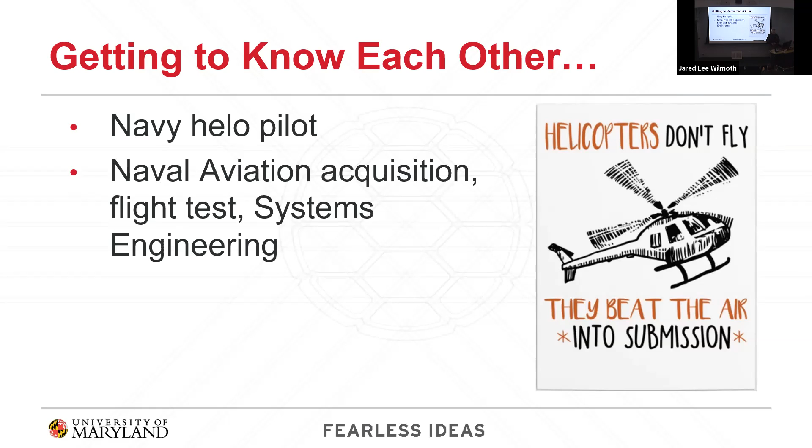So I was a Navy helicopter pilot after college, spent about 29 and a half years. Flew helicopters all over the world, on all kinds of aircraft carriers and other ships. Commanded a couple squadrons, one fleet, one test squadron at Pax River, Patuxent River Naval Air Station down in Southern Maryland. Ended up spending about 10 years in naval aviation acquisition, helping to specify the next generation of Navy helicopters, then helping make the acquisitions of those, involved in flight test of those helicopters. Also wrapped up as the military director for systems engineering at the Naval Air Warfare Center down in Pax River.

After that, retired in 2012, joined a small company just outside the gate down there and worked with them, where I did a little advising and consulting back onto the base, and also helped that company grow. So I was in industry for about 10 years. Then this opportunity presented itself last year around this time, and I joined the University of Maryland in August. It's been a great ride so far.

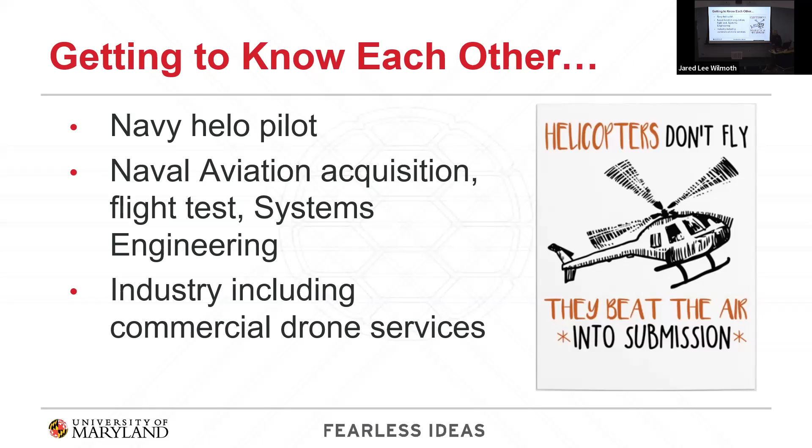So topics today: what are drones, what are they all about, what are we using them for, what are they good for? Good for a lot of things. Why aren't they everywhere yet? We've been reading now for 10, 15 years about how these things are going to be dropping off packages on our doorsteps, going to be everywhere, ubiquitous, doing everything. They're not. Why? We're going to talk about that a little bit. And then what's going on, efforts that are happening to try to get there, to try to make that situation a little bit different. And then finally, I'm going to talk about how the University of Maryland fits into this, specifically about the UROC in Southern Maryland and our role.

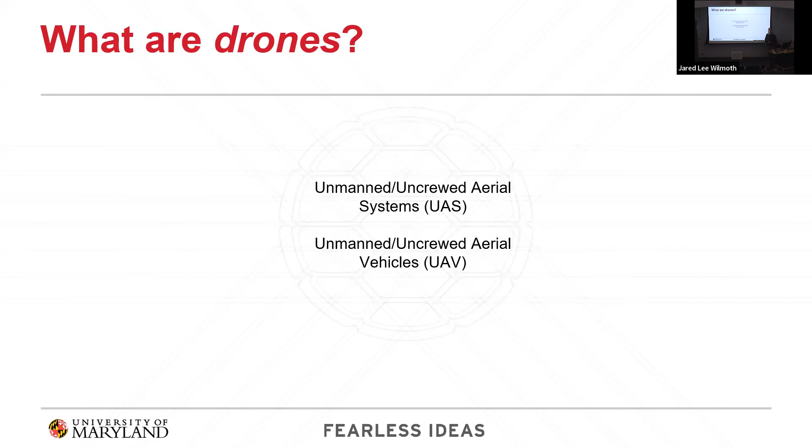So what are they? Uncrewed, unmanned aerial systems, aircraft systems. The acronym can be a little fuzzy, people say it a lot of different ways. And then there are the vehicles themselves that go up in the air.

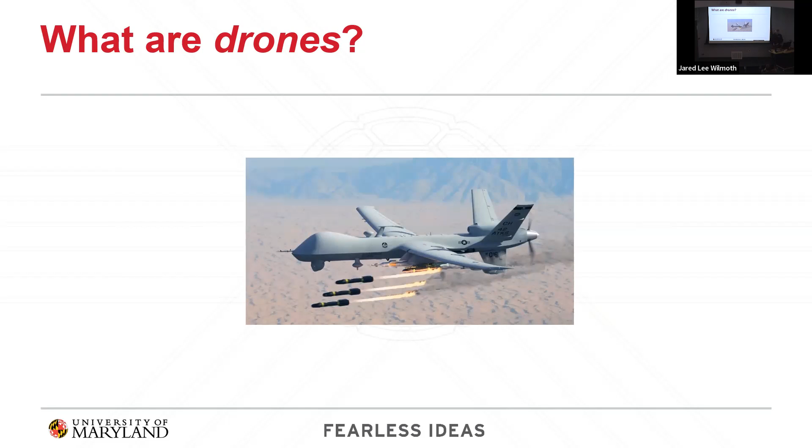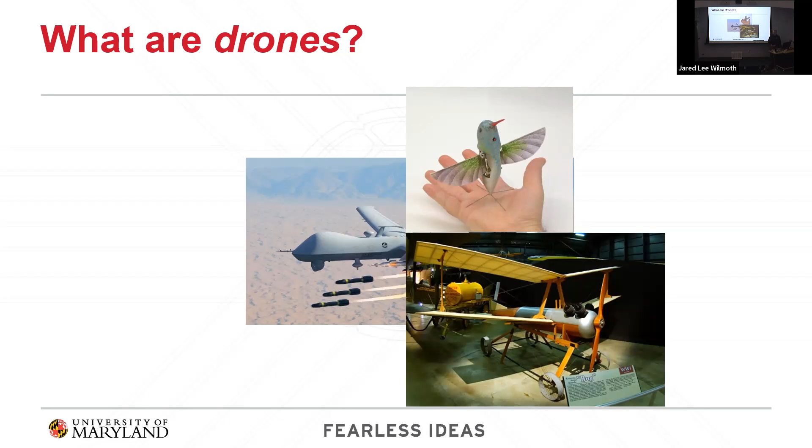This is a Kettering Bug. These things go back a long time ago. This was designed and operated during World War I. It's in the Air Force Museum. So uncrewed, unmanned aircraft have been around for a very long time, and this was obviously pretty unsophisticated.

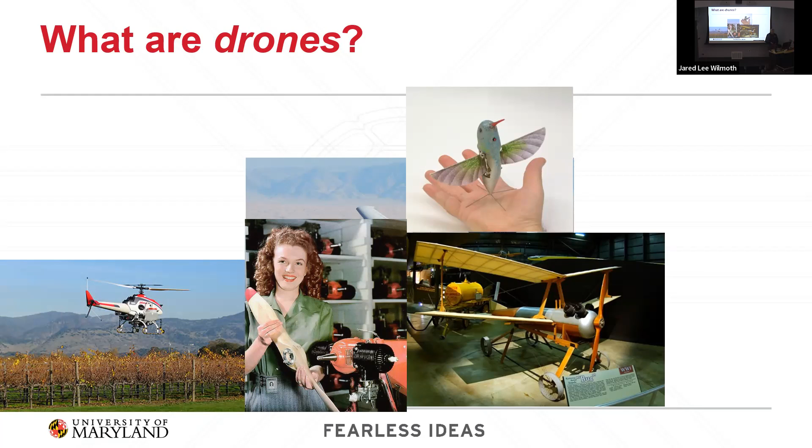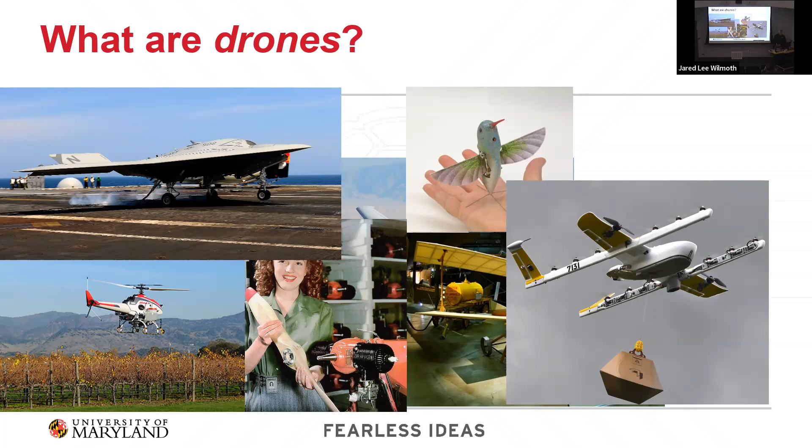They can come pretty big. This is the Navy's onboard aircraft carrier launch and recover refueling platform, the MQ-25. This thing is groundbreaking in many ways - first ever to launch and recover from aircraft carriers, and they're getting ready to deploy those. Pretty large airplane, as you can see, but even bigger they can go.

So what are they made up of? Uncrewed aircraft systems, that's the term we use, are made up primarily of the UAVs - those are the air vehicles - and all of the systems they carry, including the payloads. Keep in mind that what these things typically are is really a truck, okay, maybe a little one and maybe a big one, but it's those payloads, the things they're carrying, the sensors, that's what the real business of these things are, generally speaking.

One of the projects the UROC is working on with the Robotics Center here and Aerospace Engineering, with the Army Research Lab up at Aberdeen, is a project called Artificial Intelligence and Autonomy in Multi-Agent Systems. Think of swarms of drones, all intercommunicating and planning their own searches and coordinating their activities.

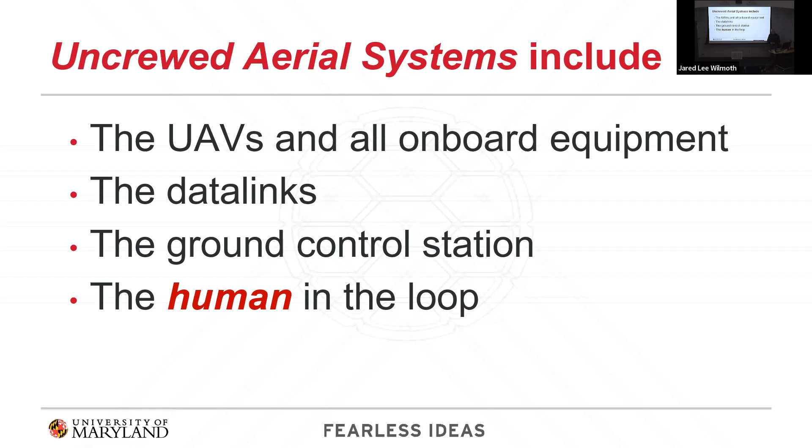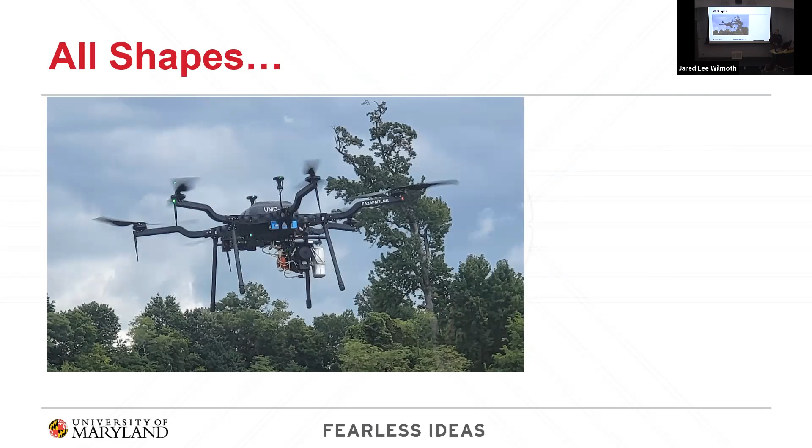They come in a lot of different shapes. This is a multi-copter, one of ours down at the UROC. It's about 5 feet across from rotor tip to rotor tip, up to around 55 pounds. There's also a single rotor type helicopter.

You'll see fixed wing - this is one of our Penguin B aircraft down at the UROC. It needs a runway, as you can see from the wheels. This is another version of that aircraft, and we're in the process right now of converting our runway launch and recover to this, which has got quadcopter type takeoff and landing motors, then converts to a pusher fixed wing aircraft for greater endurance.

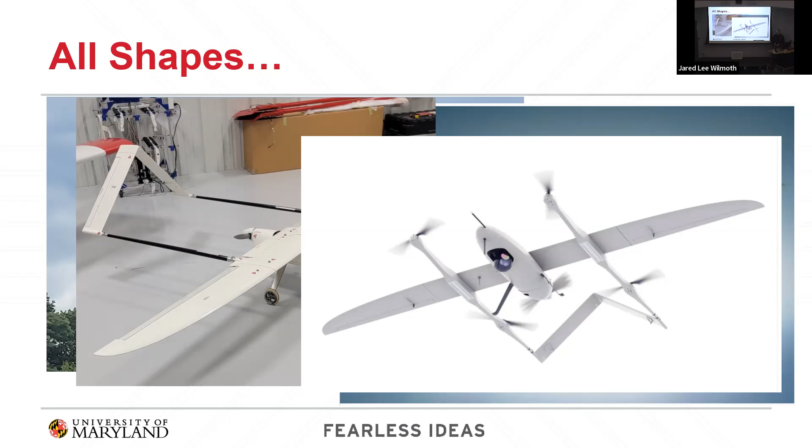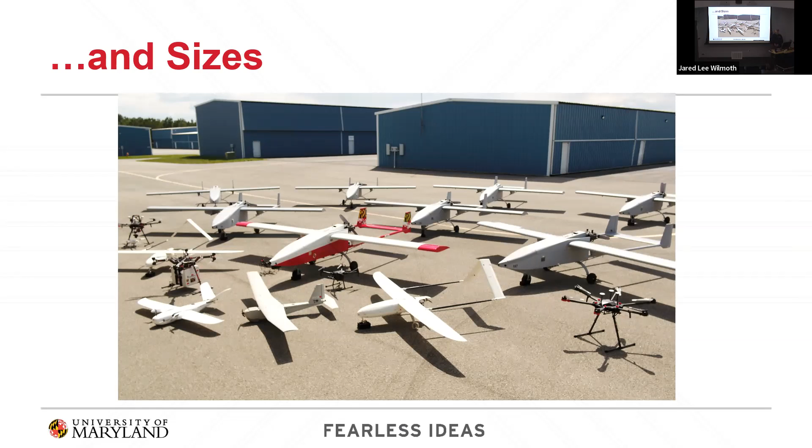This is a snapshot in time of our flight ramp at St. Mary's County Airport down in Southern Maryland. Some of those aircraft are gone now. A lot of those gray tiger sharks have moved on to a university out in New Mexico. The one in University of Maryland livery is going up in the museum down there, the Patuxent River Naval Air Museum. So this is just a snapshot of time of some of the ones we've got.

So what do you use uncrewed aircraft? For UASs, we commonly talk about the 3Ds: dull, dirty, dangerous jobs. That's what those things are ideal for. Some things are kind of dull, like flying back and forth staring down at the ground trying to see what might have changed. Drones don't get bored, so drones are really good for dull jobs.

Dirty jobs, things like getting into sewer pipes and inspecting them. People have to do that stuff right now, but drones can fly in there. Think about the stacks on a power plant. Right now we have to shut down the plant and lower humans down into those stacks on ropes to inspect them. You can do that with drones instead. You could think about a contaminated area, hazardous materials, or the aftermath of a natural disaster. There are a lot of applications in dangerous and dirty situations for drones.

Precision is another utility for these. They're great for things that require precision. As a Navy helicopter pilot, I was often involved with search and rescue, and when you're looking for something in the water or elsewhere, flying very precise patterns across that surface is key so you don't miss anything. But humans inherently have a hard time with that.

It gets boring, as I mentioned, the dull part. And it's also the control inputs it takes to stay on those patterns in wind, rain, and other inclement factors that can be challenging. Drones don't have that problem—they are extremely precise. Surveying is a similar issue, so precision jobs are really good for drones. Precision agriculture is a common application.

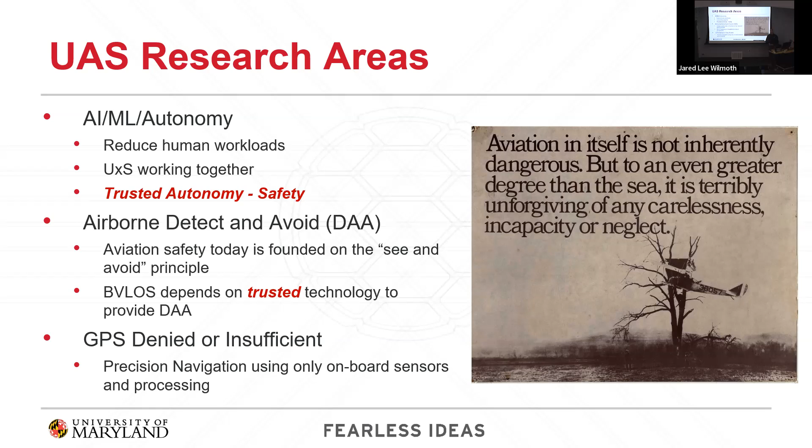And then precision navigation in areas where you don't have GPS - this could be underground, in caves, mines, inside of buildings, those kinds of places. It could also be in a combat environment where GPS is being jammed. But you need to be able to navigate precisely in order to safely operate.

So what's going on? I already mentioned Africa - that's a place where there is a lot of work going on with UAS. A lot less manned aircraft flying in Africa, so there's less risk of mid-air collision. A lot of unpopulated areas where the aircraft can be routed such that there is less risk of harming something if something bad does happen. So it's proving concepts, building up hundreds of thousands of hours to prove use cases happening elsewhere in the world.

Here in the US, industry is really driving hard. You've probably read about companies like Google Wing, Amazon Prime Air, which you may have also noticed has scaled back a little bit. Walmart is working with Zipline, the company I mentioned before. So there are a number of efforts going on in the United States to try to push the limits, push things forward.

The FAA itself, working with NASA, has done a lot of work in response to being pushed by Congress to get around this problem. So they've got some designated FAA UAS test sites around the nation, mostly rural areas, places like North Dakota, Alaska, West Texas, Oklahoma, where they're doing a lot of research on these problems in front of us.

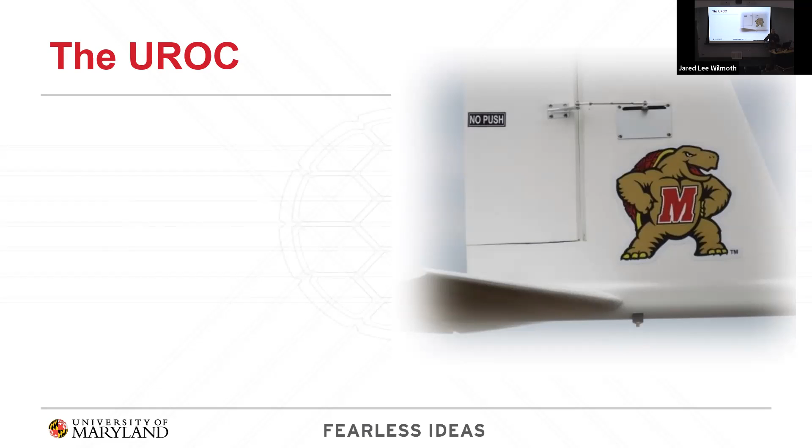The UAS Research and Operations Center is about 8 years old, down at St. Mary's County Airport, about an hour to an hour and 15 minute drive south of here, near Patuxent River Naval Air Station. If you're looking for us on a map, follow Route 4 or Route 5 all the way down until you hit the Chesapeake Bay, and we're right between the Patuxent River and the Potomac.

Our first part of our mission is research and education. So we support faculty, we support students, we have equipment, we have experience, and we have expertise, and we bring all those things to bear to help make projects go smoothly.

We support operational activities, by which I mean public and private entities. These might be organizations like National Oceanic and Atmospheric Administration. We just shipped a drone up to Alaska yesterday. One of our teams is heading up to Nome, Alaska in two weeks, where they're participating in the third year of an ongoing project with NOAA to measure sea ice thickness.

They're using satellite payloads to take those measurements today. However, the calibration of those satellites is a challenge for them. It's done manually, so they run humans out on the ice with handheld measuring devices and core drilling to try to calibrate and measure and correlate the accuracy of those satellite payloads. So the thought here is by using hyperspectral sensors and multiple wavelengths of light, we can get data that the scientists can then convert to useful information.

Somehow, don't ask me how they're doing it, but they are getting these measurements. Last winter, we were up on Lake Michigan in the winter taking these measurements, and they were ecstatic with the data they got. So this year, it's off to the real sea ice up there off Nome, Alaska. That's one of the public projects we've worked on recently.

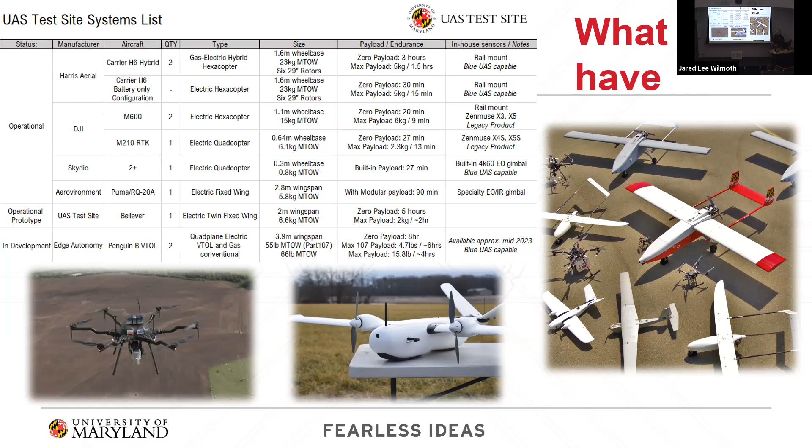And so we got a lot of different aircraft, a lot of different sizes. So what do we do? To a research project, we can bring equipment, just showed you some of that, but just as important, more important really, is the expertise. So we have engineers and pilots with thousands of hours flying UAS all over the world that can be leveraged.

We have expertise dealing with FAA and just about everything, whether that's getting what we call waivers to the rules, certificates of authorization and waiver, which is establishing chunks of airspace for use. So we can do a lot of things.

So I mentioned the payloads are really what we're talking about generally when we're talking about drones. So if some project that you're working on involves a sensor or could involve a sensor, which could benefit from going flying, it might be a thought you have, let's just go grab a drone, we will attach this thing to it and take it flying. And yes, you may be able to do that. But the commercial stuff you're going to find, the things you're going to go conveniently find, are not going to really readily be adaptable for that purpose.

So we can help with that. We can integrate those payloads onto platforms. We can help you find the right platform that's the right size, has the right kind of endurance, has the right kind of flight characteristics, and at the best price point for you too, which is of course important. We may very well already have something in stock, as it were, in that stable of aircraft that we can use for you and save you the entire cost of doing that. All we need to do now is integrate your payload onto it.

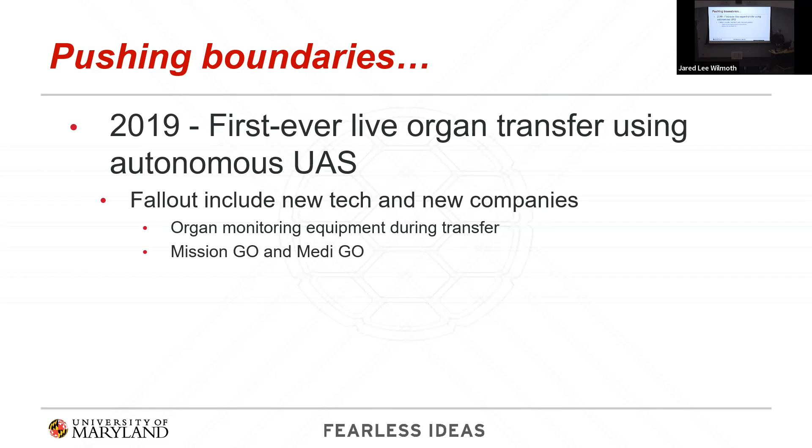The Chesapeake UAS route network is another place we're trying to push the boundaries. I mentioned the rules before - here we're trying to move into the National Airspace System with aircraft in the state of Maryland.

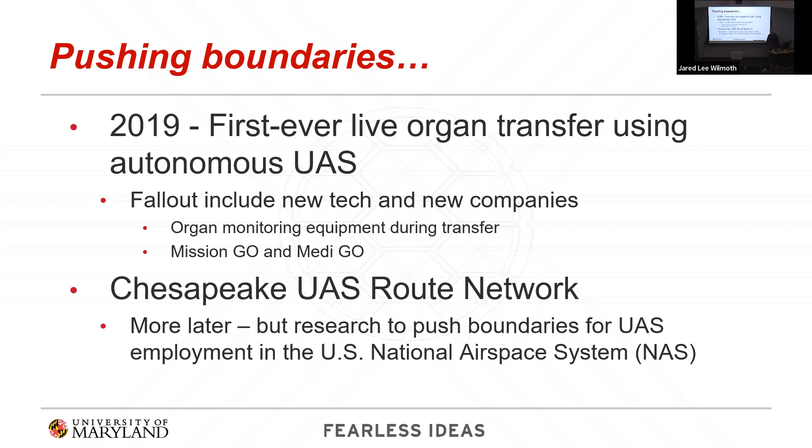So I already talked to you a little bit about some of the projects there - that was the ice thickness measurement. We've done lots of projects along those lines for various agencies over the years. I talked about integrations for private companies as well.

Airworthiness - a big part of safety in drones goes around airworthiness. Is it safe to fly? When you think about the aircraft you climb into to fly home, that thing started from a place of airworthiness, started from thinking about safety. How do we build a safe aircraft? That is really where it starts.

Drones typically start with, hey, this is really neat technology, and then later on comes the thinking about how do we do the aviation thing. That kind of gets things backward, and safety kind of gets thought of second. So airworthiness then suffers.

What does that mean? Airworthiness is a way of measuring the engineering goodness, if you will, of that airframe, making sure that it is a safe aircraft to go up in the air. So we've put together our own methods based on how the DoD does it, scaled down to be appropriate for small UAS, to measure them and make sure they are safe to take flight.

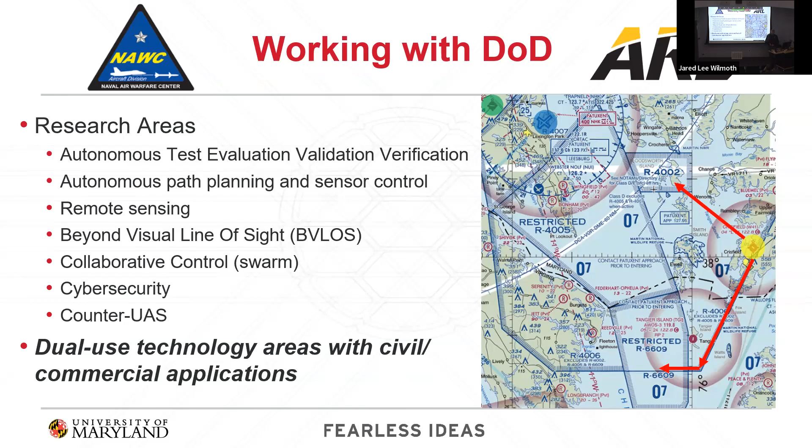And then finally, this is a dual use project. This is something that law enforcement could take advantage of as well. You could also think about using this same kind of technology to put a robot down on the ground in a contaminated area to inspect and so forth.

We're doing a similar project right now with the Army on that Artemis project - this is DARPA, Defense Advanced Research, a triage product. So they're saying, how can we go out and remotely deploy sensors to do triage of mass casualties? Let's detect who's alive, who's in need of immediate attention, who's already dead, and who is good enough to come later. So that triage project - we'll be using drones for that too.

The Chesapeake UAS route network - think of it as kind of a highway in the sky, that's the concept here. We run a backbone for this route network down the Chesapeake Bay. We keep it over water - that's a risk management technique, so that if something happens to one of these, they fall in the water, not on somebody's head.

The idea here is to really push the introduction of UAS into the national airspace. On demand means you file a flight plan just like you would with a normal aircraft and you go fly. Today, if I want to go beyond the visual line of sight of the operator, I need to first go get permission from the FAA through a waiver process to the rules, which can take weeks or months. We want to be able to do that on demand.